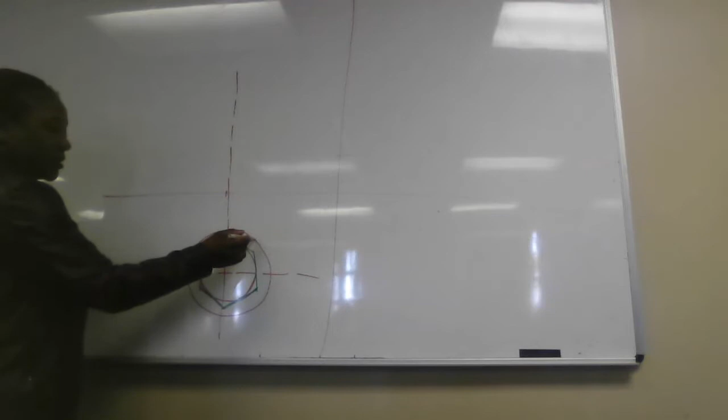45 degrees here, and then 45 degrees that side. Something like that. And then you are going to connect this point to that point.

Once you copy that, you project up. And what are you getting? You are getting your front. This is auxiliary view, and it's also the top view. Why? Because this thing is sitting on the ground.

But there will be questions where they give you when it's sitting like that. You can't say that the auxiliary view is the top view. A top view will be viewed like that, unless when it's sitting like that. Auxiliary view becomes the top view as well.

And that's why I've drawn it here. But when it's slanting like that, you can't use this as your top view. Okay, so this one is very, very, very different. The next thing you're going to do is project up to get your front.

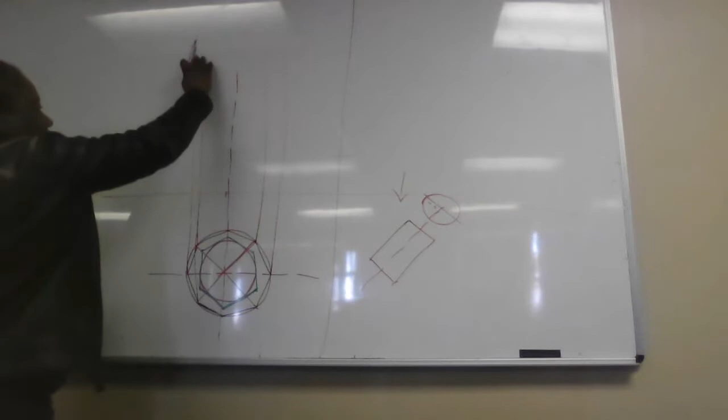This corner is with that corner. And then the center, in this corner you project up. And that one is going that way. Okay. So what I'll do, I'll use this as the base.

And it's got a height. They say that it's cut at 45 degrees. You follow that cut of 45 degrees until it finishes to cut here.

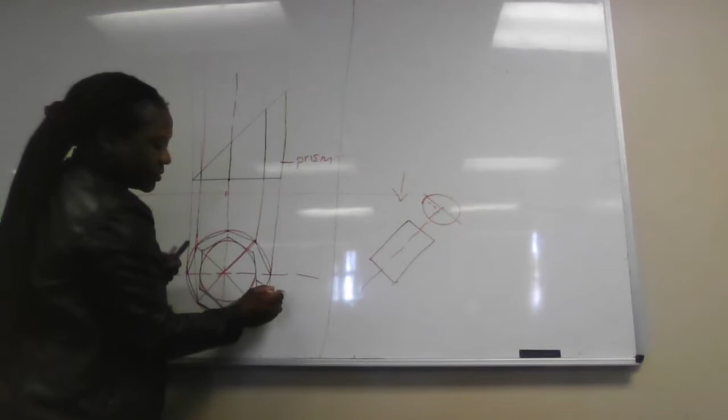Okay. After you cut, you're going to project the inside, which is your, this is a prism, okay? We call this one a prism. And the one that is inside here is pyramid. So you project your pyramid also up, the green one.

So I'll project the pyramid that way, and the midpoint. But the pyramid is going to the apex. If you check nicely there, there's an apex. Yeah, you'll see there's an apex of 90 millimeters from the bottom. Can you see? So you measure 90 going up.

So let's say 90 is up to there. I'm going to use green for the pyramid. The bottom of your pyramid is here. That one, this one, and that one. Can you see my dots?

I'm taking from the green one. You see where they are hitting at the bottom here. Then from there, you take to the apex.

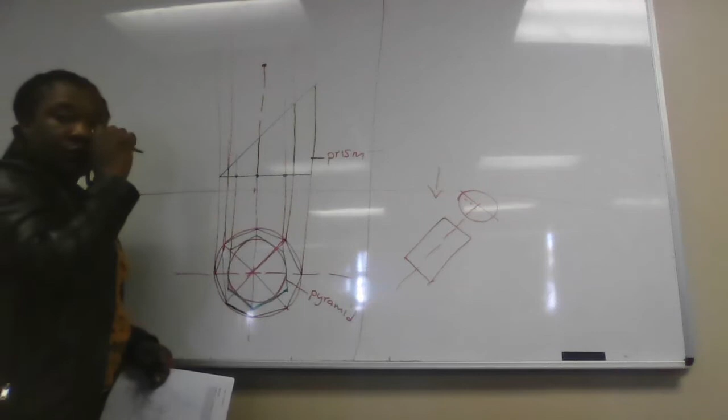So with this one, you can't draw the front before the auxiliary view. You first have to do the auxiliary view. Whether it's sitting like this or sitting like this, the front is always taken from the auxiliary view.

Okay, so this is what I've done. Why the black one is a prism? Because the lines are straight. They are not converging to the apex. But the pyramid must converge to the apex.

So what are we going to do? From there, you join to the apex there. But make sure that you draw with a ruler. This one also. And then this middle one.

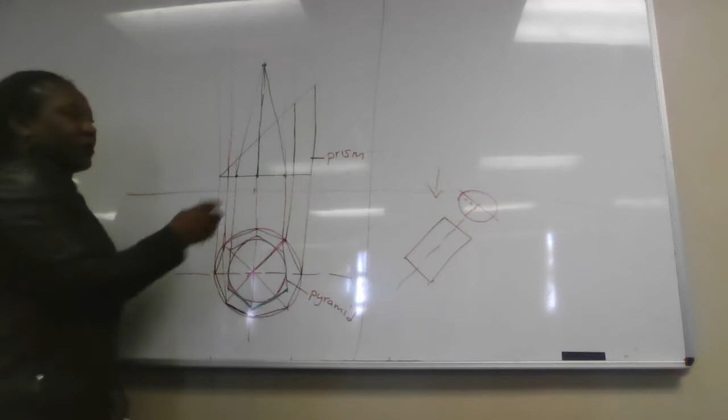But do you know that this is hidden details? Because it's inside. They have even shown you there on the drawing. It's hidden details, this one also. But this one will be solid because of the prism outside. It will be a solid line that way. Then this one will be hidden.

You copy. But before I explain to you this one, I want to briefly just show you the one concept that will help you remember. Let's take, for instance, we have this shape here. And then I tell you that this shape is maybe going that way, straight that way.

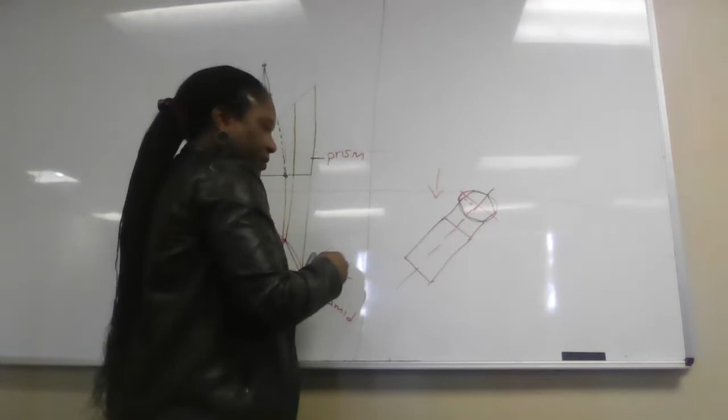Can you see? It's a hexagon, an auxiliary view of this. So you are going to project from there to get the front like that and project like that. Then the midpoint is that. Then you are going to get your, can you see the front?

And this will be solid. Why is this solid? Because it's a corner. You know those corners of the hexagon.

What we do, if we are given this and the examiner wants a right or left, the only secret here is to know, where am I looking from? In first angle projection, the front is a right view. Do you know that? In first angle projection, your front is called a right view.

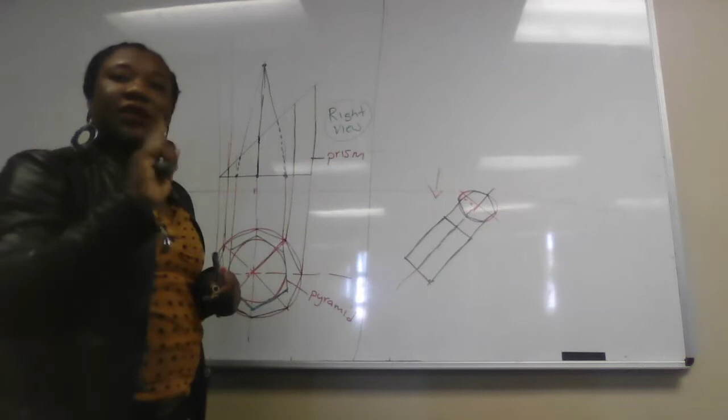So if you read the question, they can't ask for a right view. What are they asking? Left. Because right view is given. As long as it's first angle projection, they will never ever ask for a right view. They will always ask for left. So in first angle, we are going to do the left here.

Then in third angle projection, they will never ask for a left view in third angle because a front view is a left view. That's the difference. So if I give you this one and I want to view from there, it means which angle is this? Third. Because it means the front is a left view.

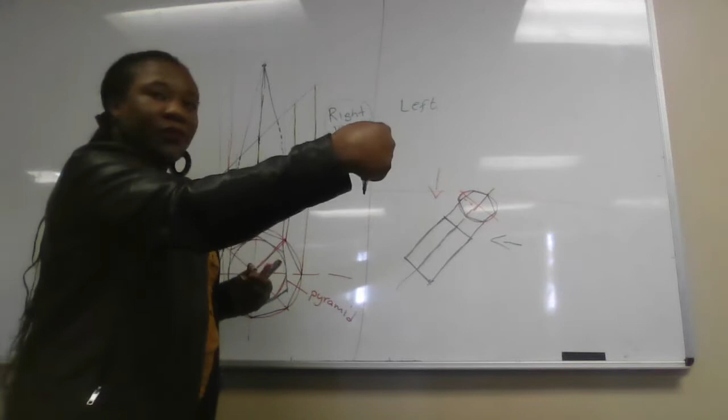So this one, I'll give an example like we are looking from right. And if we are looking from the right, what you are supposed to do is to get a quadrant like that and put the top here. Let's just focus at that. I'm just giving face before we come here. I give you this with its auxiliary view.

So in planning, you will know to say, oh, it's third angle projection. I need to draw the front view down. Then I leave space for top view. The way I did like this quickly here, because I knew it's first angle projection, front sits up on top. I need to leave space for the top view down. And front is a right view in first angle projection. So this is third angle.

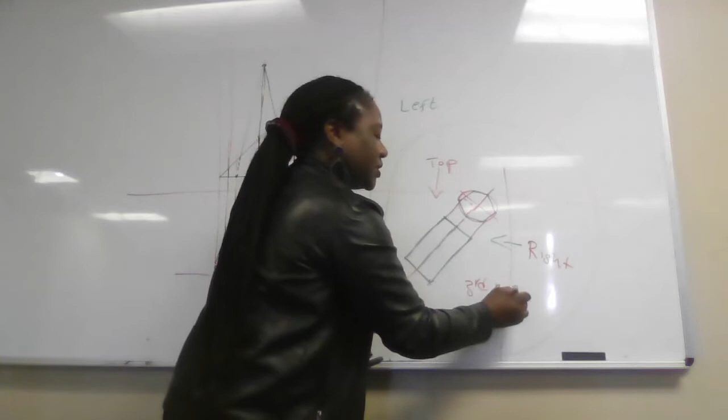And what do we do for us to get the other view here, which is now going to be called right view? You know, I'm now teaching third angle projection. This is your left view, but it's the front. So in third angle, they can't ask for a left unless the question is wrong. They will never ever; always they'll ask for right view, meaning you always look from the right of your front.

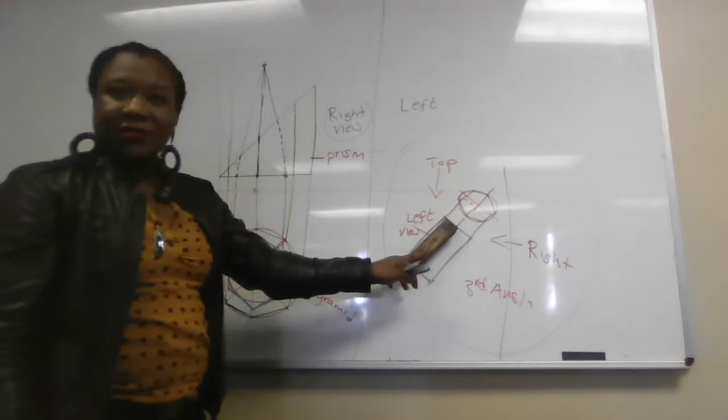So what I tell students is that these things are solids. I think Mr. Rene showed you the prisms. They are not here, they are upstairs. If this is a hexagon prism, assume like the way it is looking, and then I put it like that, and it's sitting on the ground. And then you are looking from there, from the right. Which of the two sides, this side or the bottom side, are you going to see most if you are looking from the right? Which of the sides, this or the bottom? The top, right? Because you are looking from there.

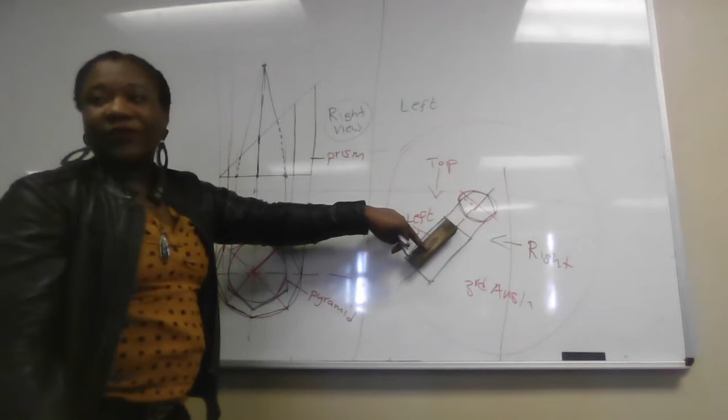And again, if I want it in first angle projection, it's the opposite, because I'll stand this side and I'll see this in full, fully outlined. Okay, so this one, because we are looking from the right view, do you see that you will see most of this than the bottom there? But you need to understand what is the shape here. That is the shape they give you. If it's a square, they will show a square there. But when you start getting your right view, you will get a shape which is here, because that's what you are looking at.

We'll do two shapes. It's like we do a roof and we do the floor. Then what joins the roof to the floor? The wall. Which is the wall? The edges. Those are straight lines when we do the right view. So the first thing I tell the students is that you must always start with the face that you are closer to. So because you are looking from there, project the face here before you do the bottom. After you finish that, already you know this face is fully outlined. No hidden details because I'm looking near there.

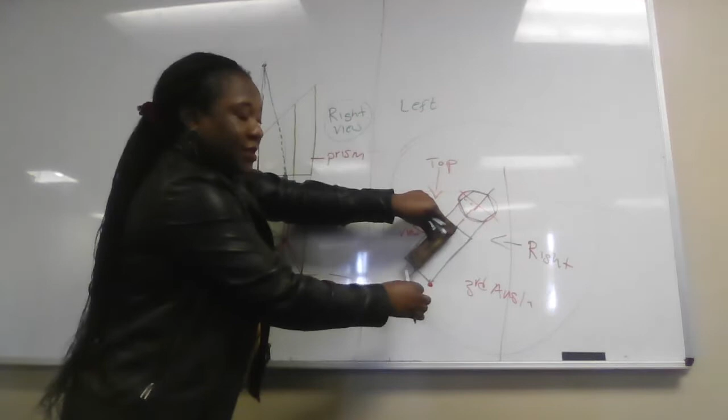And when we come to the bottom here, there's a half which is from that corner to here, which you will see from there, but you can't see this edge when you're looking from that side. So when we come to the bottom side, there's a half which is going to be outlined, and there's a half which is going to be hidden. But this is fully outlined. And again, if I was looking from the left, I was going to outline this bottom fully and leave the top half outlined and the bottom half hidden on the other end. It works like that. So you have to know where you're looking from.

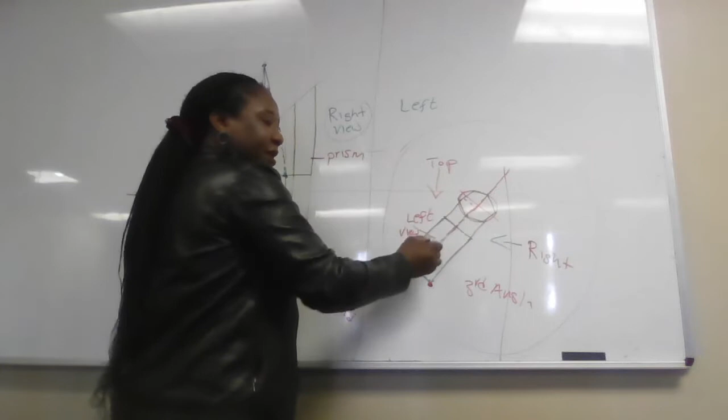Fine. There is our drawing. There is the auxiliary view. When we come to auxiliary view, when I say a right view, it's the right-hand side of this center line. You see this main center line here. Which one is the right of this line? Right, left. Can you see? Look at my arrows. This is left. This is? The way it is slanting, you stand like that. Then you can see right, left.

So when we come to the other half, which is going to be half hidden, half outlined, the one that will be fully outlined is the right half, because that's where you're looking from. The right half is the one that will be outlined. But what we do, we number. You see the corners there. Number 1, number 2, number 3, number 4, 5, and 6. There's an important center line that I want you not to forget. Not this main center line. This main center line is just to demarcate right from left. Where is our main center line here?

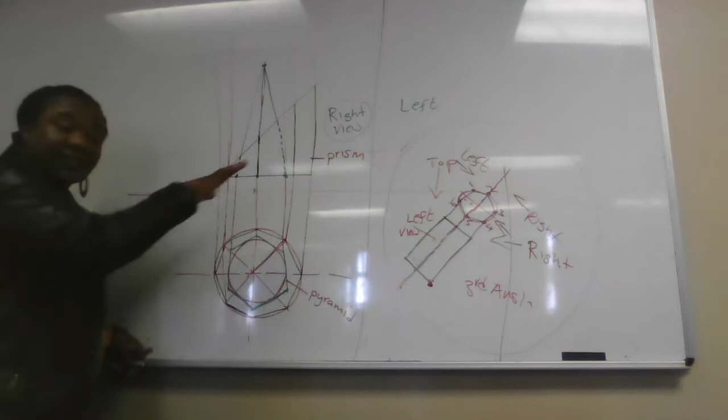Right, left. It's sitting flat, but it's different from that one because this is tilted. So my eyes must be in line with that main line. Then the right-hand side on the auxiliary view will be viewed from 2, 3, 4, 5. Can you see?

When we come to the main object, which is the front view, when we are looking here, we are looking at the faces. It's this face and that face, and this line and that line. If you can see 3, 4, it's this one. I'm going to now number them. Which one is number 1 here? Do you see this is 1 and 6? Can you see? Then also at the bottom is what?

1 and 6. So when I'm creating a roof, I will focus on the points here because that's where I am looking from. Then I've got number 2 and 5. You see this one? We got 2 and 5 and 2, 5. This one is 3 and 4. 3, 4. Now the question is project your right view. To project the right view, you come in that quadrant. You look at the face that is fully visible. We agree it's that one.

So project from each of those corners 1, but make sure you don't draw through your auxiliary view. It must be a bit far because it's untidiness. So we don't project from the auxiliary view. It's very wrong. You can't project from the auxiliary view. The auxiliary view is just to help us get this shape and also to do the marking. I'll show you how we do the marking.

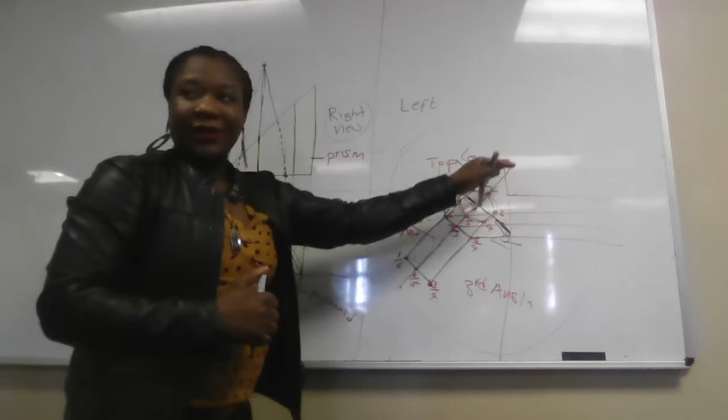And then for you to go and get the marking here, you need to know this center line. I want you to look at this black center line. This black center line is very, very important in drawing. When I'm teaching, I call this one a Y line. It's perpendicular to the main. And the Y line is always a line or center line parallel to the width. Do you know this is the width? When we come to our shape here, is this the width or this is the width? It's this one. So your Y line is this one.

If you know your Y line, this subject will be easy because there will be times they say the shape is facing that side. So your Y line is, that's it. So there we know the Y line. Then when you come to getting the right view, create another line anywhere where it's convenient, maybe like that. This and that, they are one and the same. But here it's looking like from the right view. This is just from the auxiliary view.

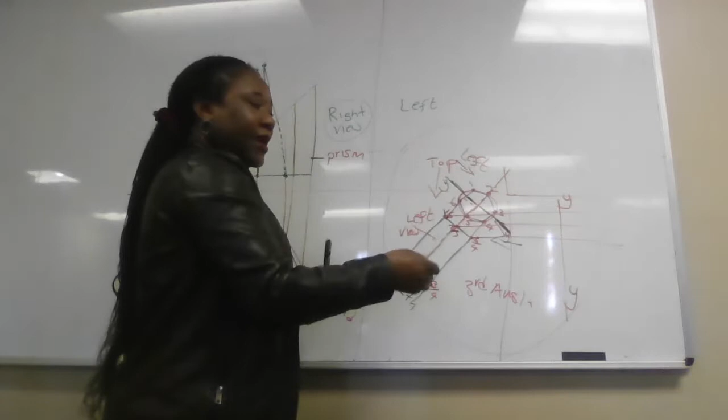Guys, what it means by Y line is that any numbers that are on the Y line, when you are looking from here, you see the way I'm facing like that, the way I did the arrows, I said this is my right view, you remember? So when I'm looking from here, when I put the arrow like that, which numbers are on the right of the Y line? On the right-hand side of the Y line. This is a Y line, you see it? This is your eyes, you're standing like that. Which one is right, which one is left? It's like I'm standing like this. Is this not right, left?

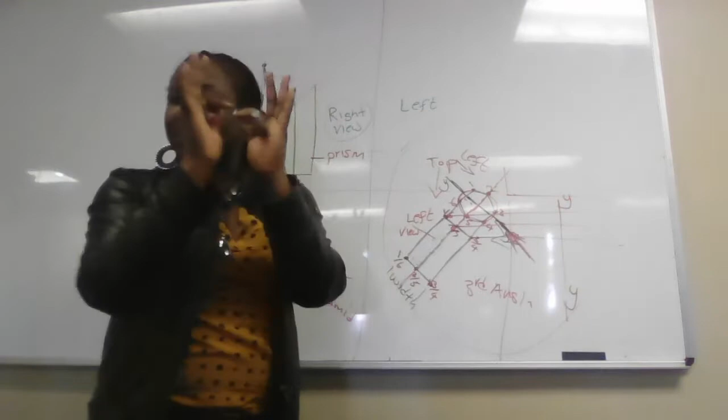When I come to this one, you see the way it's facing. Then if I can put a shape here, let's say it's sitting like that. Then I say 1 here, 2 here. There is our Y line. I must stand the way I'm standing. You see, put the Y line in the middle of my eyes. Then I'll know that 2 is on the right. Maybe there's 3, 1 and 4; 1 and 4 will be on the left of the Y line.

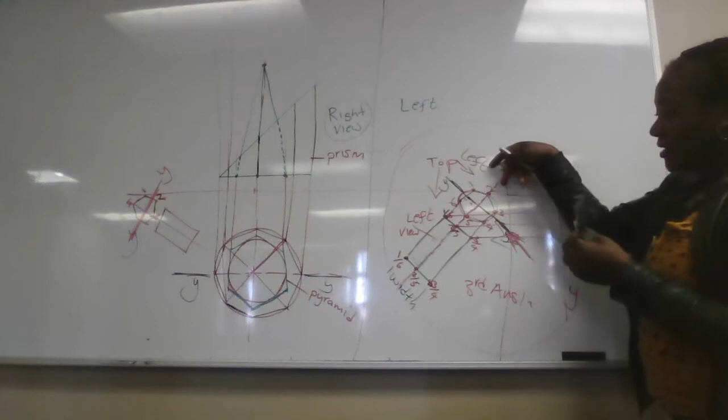You change the orientation, follow the Y line. From the left view, stand on the left like this and look at the Y line. Right of Y, left of Y. Right view, you must be standing like on the right of this. Then you can know right-hand side, left-hand side. Then you'll be marking the same way here, but you'll see how we do the marking. I'll start with 1 and 6.

Is 1 and 6 on the Y line or away from the Y line? This one here and this 6 here. How far from the Y line? You take your compass like that. You see that distance? 1 is on the right, right? And 6 is on the left. So that distance, when you take it, go with this horizontal line, put your compass here, mark what? 1 and mark 6.

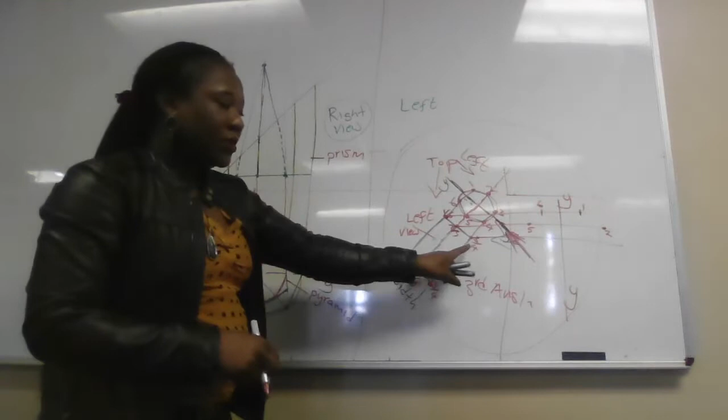We do the same with 2 and 5. We take our compass that way. 2 will be marked on the right, 5 will be marked on the left. That distance you go with your compass, put your compass here, you mark your 2, you mark your 5. And then you go to 3 and 4. Obviously 3 and 4 is the same distance with that, can you see? But 3 on the right, 4 on the left. So I'll just align with 1 and get what? 3. And align there and get what? 4. We have agreed that that is fully visible.

Connect your points. It's 1 to 6, 6 to 5, 5 to 4, 4 to 3, 3 to 2. You see the shape we have created. I'll do the same at the bottom and then later on join them with vertical lines. Then I'm done with that shape.

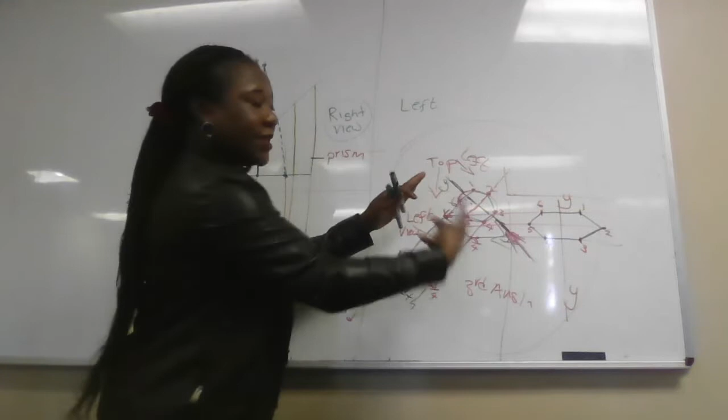When we come to the bottom, one half will be outlined, one half hidden. Which half will be outlined? You come to the main center. It's the right half, not the left half, because we are looking from the right hand side. It will be the right half of your auxiliary view that will be outlined here, which means it's 2, 3, 4 to 5 only. Then 5 to 6 to 1, 1 to 2 will be what? Hidden, because it's on the far left. We are on the near right.

Fine, there is point 3 and what? 4, horizontal line. And then 2 and 5 at the bottom. 1 and 6. For you to mark 1 and 6, you can either align. There is 6, align, and mark 6. Can you see here? 1, I can just align there and mark 1. Or you do the same measurement. Then you go to 2 and 5. Where is 5? There is 5. Align, mark 5. 2, align, mark.

And then we have 3 and 4. The other 4 is here. Align, get your 4. And then go straight there, mark 3. There's your Y line. I said one half is hidden, one half outlined. I've already mentioned which half will be outlined. It's 5 to 4, 4 to 3, 3 to 2. This is this one. Solid. But from here to here, hidden. From here to here, hidden details. From here to here, hidden.

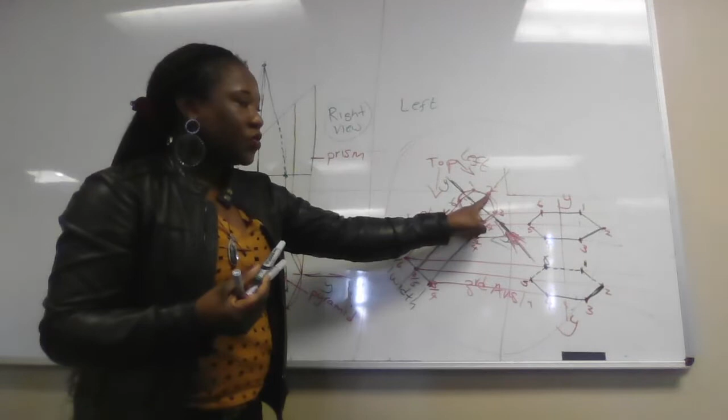We have created the two faces of the solid. Then we need to join them. You can see there on the sketch, they are joined with solid lines. It's 1 on top with 1 at the bottom. 2 on top with 2 at the bottom. 5 on top with 5 at the bottom. 3 with 3. 4 with 4. We have them sitting there. But again, you have to know which ones will be outlined. It's only 2 to 2, 3 to 3, 4 to 4, 5 to 5. Why? On the right half of where you are viewing from.

So I'll start. 5 to 5 is what? Solid. There is 5 to 5 here, solid. 2 to 2, solid. Which other one? 3 and 4, you see? Because it's on the right of the main center. 3 to 3, solid. And 4 to 4, solid.

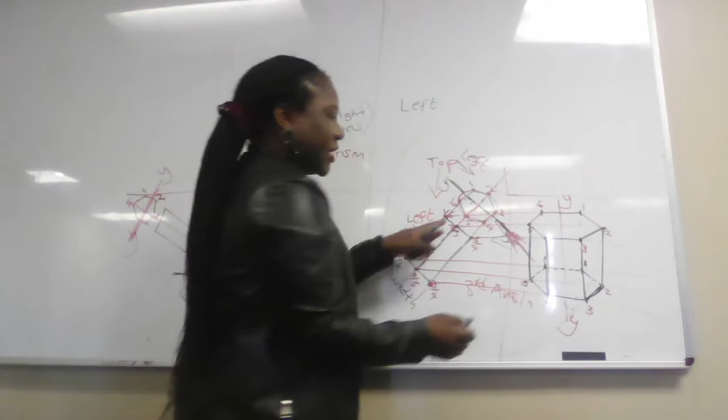Then we can't see how 1 goes to 1. You are not going to see this line here because you are on that side. So how 1 goes to 1 at the bottom is hidden. From this 1 to 1 here, it's supposed to be hidden details. But there's a solid line, so you just indicate hidden here, until that point. 6 also you won't see. You are going to indicate like that. That shape is done.

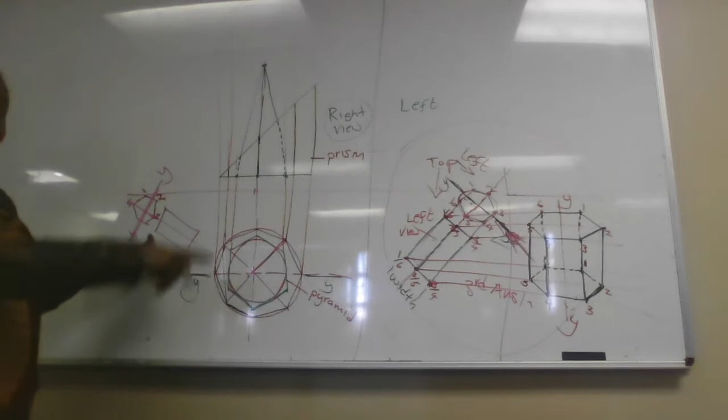It's the basics. It's Y line. It's the main line. Main line is to show right, left. Y line also is right, left, but you follow where the Y line is tilting to. Then you can know which one goes to the right of Y line, which one goes to the left of Y line. It can either be this way, or that way. No other way. It's either sitting flat, tilting to the right, or tilting to the left.

So I'm going to show you only this one, the left view. Because once you get the left view right, it's easy to get the top. How is it easy? You are going to work with projection. You see, there will be a 45 degree line here, right? We want to get the top view in this quadrant here, looking from the top of this one.

Do you know that when you're looking from the top here, you will see the top edge more than the bottom edge? So you project the top points here up: 1 and 6, 2 and 5, 3 and 4. But avoid drawing through that.

It needs to be far. How do I get a Y line here? Go to the Y line here and choose 45 degrees. Take it here. So this will be a Y line on the top view.

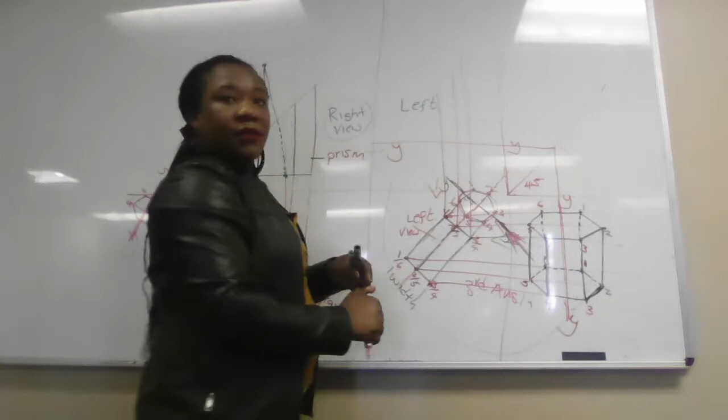Then for me to start getting the top face here, this is 1 and what? 6, right? I need to go there and project 6 to the 45 degrees, point 6 is here, where they meet with the other 6 coming from the front. You go to 1, there is 1 here, up with 1, 45, you get your 1 here.

So let's just make it uniform. The Y line should be in the middle, like this. 6, 1.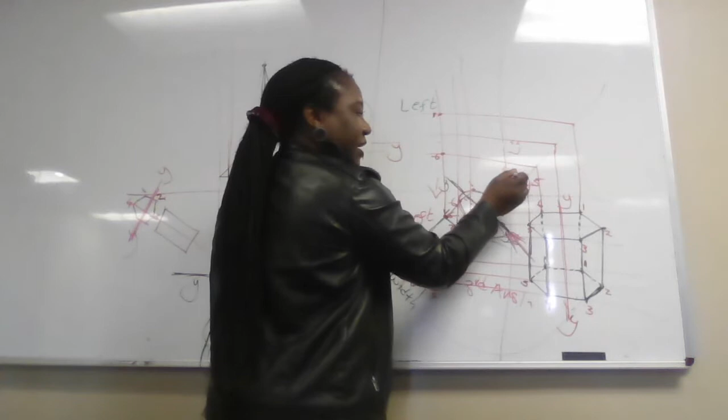Then we go to 2 and 5. There is the line for 2 and 5. Where is 2 and 5 here? You go to 2 and 5. There is 5. Go with 5 until it hits 45. Bring your line here to meet 5 here. There is 5. 2 was on the other end. Go up with your line straight to the 45 degrees line. Take it here and get what? 2, with 2 coming there.

Then the last 2 points is 3 and 4. We already have a line going that side. Where is 3 and 4? It's here, in the same line with the 6. Can you see? Then you come and mark here. Which one is 4? Yes. Then it's 3 here, 3 with 1. Get it here. 3 - you see the shape is formed.

And we know we'll see it fully because that is on the highest point. So you need to outline it. This is the shape you're going to get.

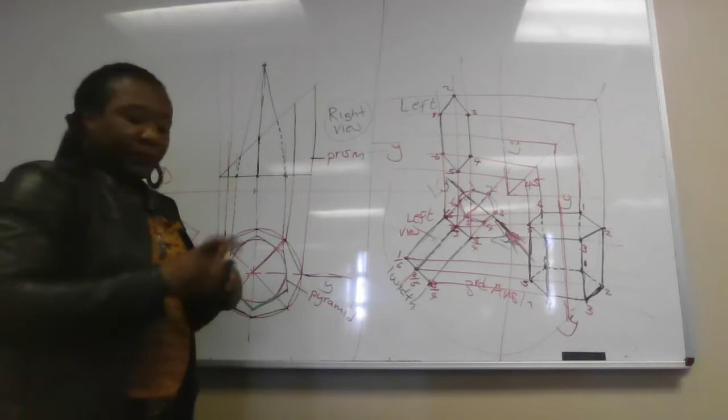Then you do the same at the bottom. At the bottom, we are not going to see both halves. It's one half hidden, one half outlined. Which one is hidden? The bottom piece you can't see. It's opposite now - the one that we'll see is the one that is a bit higher.

Can you see? You will see how 1 goes to 2 and how 6 goes to 5 because it's the one on the highest end. It's like I put it like this. You're on the top view - you will see this edge more than the bottom. Can you see? More than that edge from the top.

Yes, but you project vertical lines. 1 and 6, 2 and 5, then 4 and 3. Again, 1 and 6 - this is 1 and 6. I'll just project this one and get my 6. There is 1. 1 was here. There is my 1 here.

Then 2 and 5, you go up. Where is 5? There is 5. Then another 5 is here. There was 2. Where is 2 here? At the bottom - 2 is there.

Then 3 and 4. Just where 3 was, you come here, you come and mark there. This was 1, then you get your 3 at that point. 4 is going to be here. This was 6, you see?

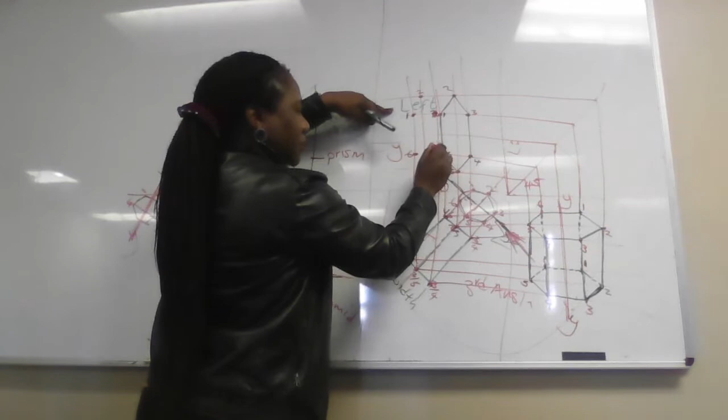Then outline the half that you are going to see. For sure, the outside one must be outlined - you can't have hidden details on the far end. So the outline is 2, 1, 1, 2, 6, 6, 2, 5. But from 5 to 4 here, hidden details. 4 to 3 here, hidden details. 3 to 2, hidden details.

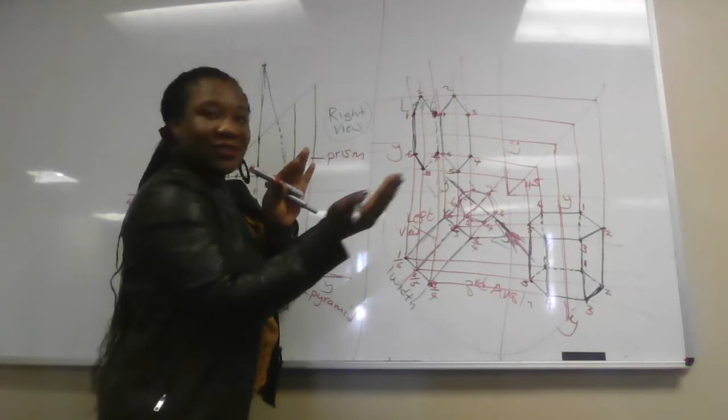There is the other shape. Now we need to join them. Joining them, because you are on the top, you will see 1 to 1, 6 to 6, 2 to 2, 5 to 5. How 3 goes to 3, it's underneath - you won't see it. And how 4 goes to 4 is under - hidden details. It's like this.

And then I'm on top, I can't see the bottom. The 2 edges at the bottom are those 2 - I won't see them. So you are going to join 1 to 1 solid. There is 1 to 1 here. Make it solid. 6 to 6 solid.

Which other one? 2 to 2. Because it's the outside one, solid. 5 to 5, solid. Then now it's 3 to 3, hidden details. There is 3 to 3, you just put hidden details here. Also 4 to 4 here, hidden details.

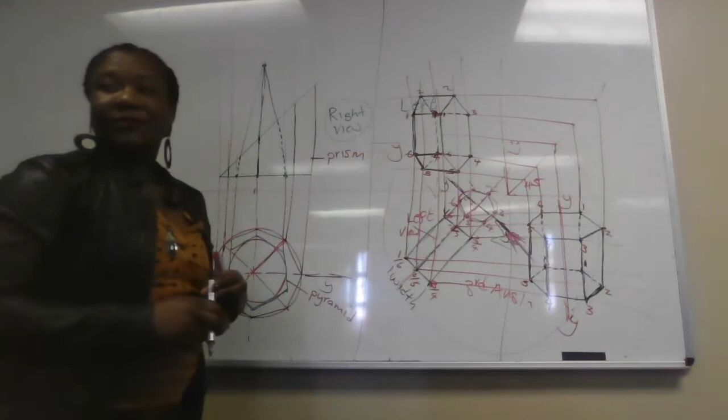Done. It's finished, eh? I don't know if it's making sense. Yeah?

I hope so. So, this one I'll guide you on just how to get the left view. You will get your top view by projecting down.

Immediately, one view, you see the way it is easy here because this is complete. The only way to get this is to mark from the Y line, perpendicular to your Y line. You always have to identify your Y line by looking at the width of the shape.

The main center line is just there to guide us which side we are viewing, for the sake of knowing which half is hidden, which half is outlined. If I was looking from the left, it would be 2, 1, 6, 5 outlined because it's the left view side of the main.

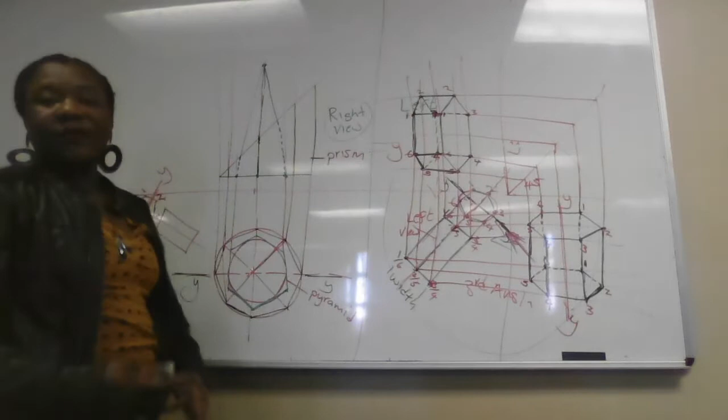Okay, so I'm going to clean this side because I need to project which view here - left view in first angle projection. I was doing third angle here. You see the setup of third angle: the front is down, the top is here, right view - this is a left view.

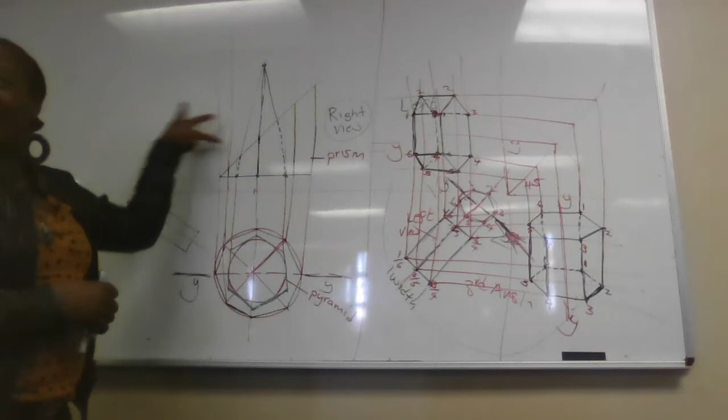When we come to first angle projection: top view, front, which is your right view, and then the left view must be here. Now here we'll be looking from - can you see? We'll be looking from the left side of the front, and now from the left side of the auxiliary view, because it's sitting flat.

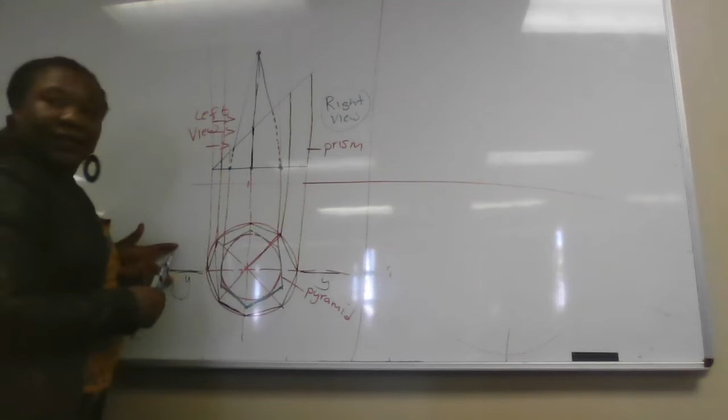Then when we come to the auxiliary view, which is the left side - I said that to identify the left side, you use the left side of the main line. You see the main center, this is the main center. So our left is this side. On the auxiliary view and on the front, they are the same. It's different from that one because it was tilting like that.

Let's number them. How do you number? You start with the bigger part. Here we have two pieces - there's the prism, it's a hollow prism, hollow inside, and there's a pyramid sitting inside the prism. That's why you see hidden details like that - it's this pyramid that is sitting inside.

But we didn't even finish - it was cut, right? It was cut at 60 degrees, coming like that and like this, then this whole piece is gone. And then there was a circle or cylinder sitting like something like that. It's cut.

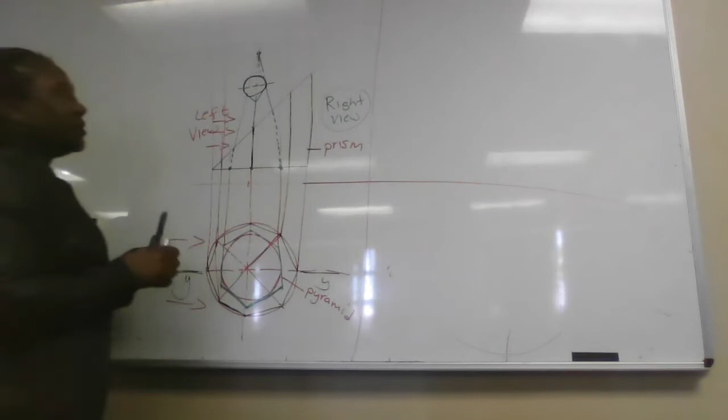Now we are going to mark from the auxiliary view. Let's start here - I'll call this one number 1. Then this corner here, number 2. This other corner, number 3. This number 4. This other corner, number 5. This number 6, 7, 8.

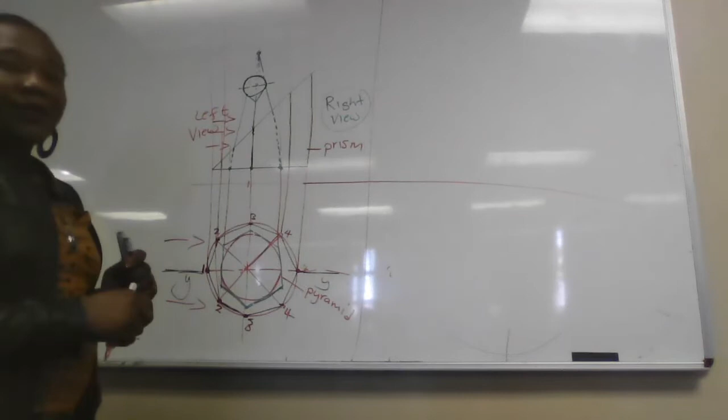But I usually number them this way: 1, 2, 3, 4, 5. It's much easier, can you see? It's 2 and 2, 3 and 3, 4 and 4 - why? Because it's symmetrical. You can number like that - I mark 2 here, 2 there, 3 here, 3 here, instead of numbering until 8.

We start going up here. Which one is number 1? Can you see number 1 here? 1 point for number 1. Number 2, when you go up, there's 2 at the bottom - can you see here? And 2 where? Yes. Then you go to number 3 - it's 3 at the bottom and 3 at the top, only up until where it was cut.

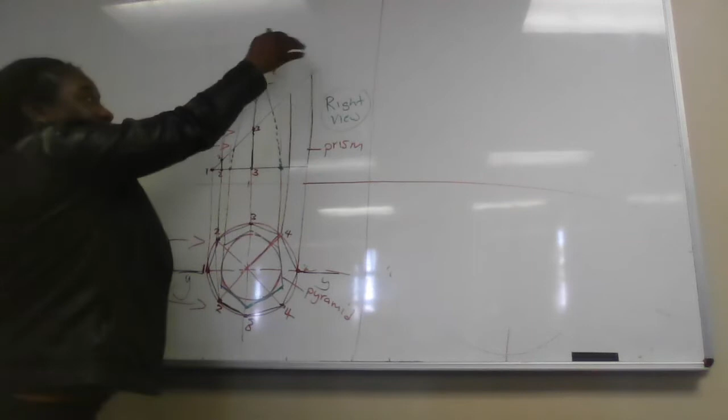Ignore the rest - it was like that, but it's been cut off, so just work until the cut. Then it's number 4 - when you go with 4, there's 4 at the bottom here, and 4 at the top. Number 5, this is our 5 - it's 5 at the bottom, and 5, done.

So when we are looking from the left view, you must tell me yourself, looking from the left side there, what do you see most? Obviously it's that face, can you see? All of the points there you will see. You will not see the shape of the octagon because that is just a line, but in the front you see the octagon.

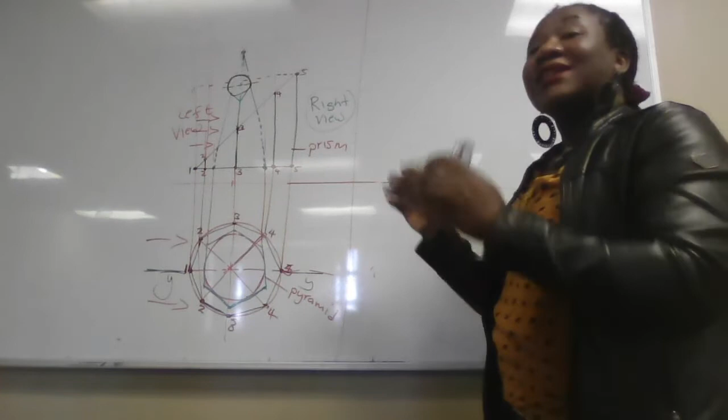Coming to the bottom of the octagon, do you know that 1, 2, 3, 4, 5 - they are all at the same plane, in the same line, but at different points. Why at different points? Because they will be lying at different positions. You see number 1 is on the Y line - this is the Y line, it's that Y line I put here that we need to introduce. So this Y line is the same as that Y line - so any number that falls on the Y line must be on the Y line here.

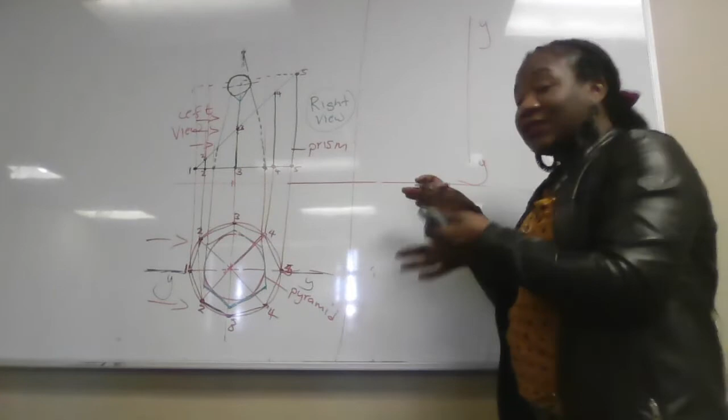Any number on the right of the y line must be on the right of the y line. But how do I look at the y line? Not the way I'm standing here. It's on the left side, because we are viewing from the left, so I must stand here. The numbers on the right of the y line are 2, 3, 4. We have the same numbers either way, it's much easier either way. But if I numbered 1 through 8, then 6, 7, 8 would be on the right.

So you are going to project, starting with the bottom, a straight horizontal line. Start marking with number 1. We haven't gone to the cut yet, I'm at the bottom first, where the bottom is the same solid line. Where is number 1 in relation to the y line? It's on the y line. When you come here, you just mark 1 here, you see, there is 1 on the y line.

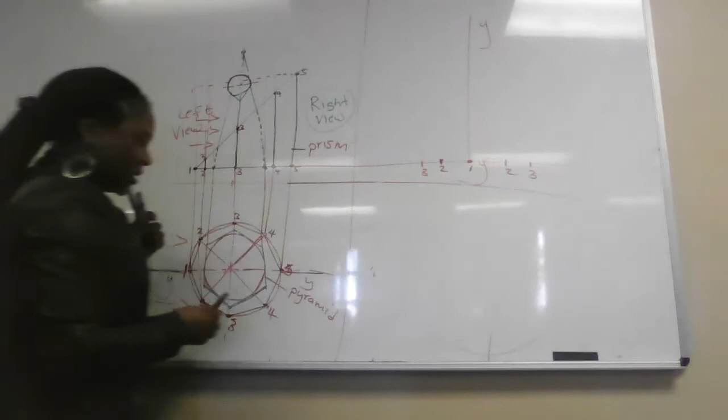Where is number 2? You see that distance, which is the same, so there's 2 here and 2 there. Once you take that distance for number 2, put your compass on the y line and mark 2 and 2, on the same plane, because all these numbers are at the same position. For 3, take your compass and get 3 like that, then put your compass here and mark 3 and 3. Which one is left? 4 and 4 - 4 is here, but when we come here, how far? Take that distance, it's the same height as 2, so 4 over 2, over 4, same distance.

Then it's number 5. Is 5 away from the y line or on the y line? On the y line, so it's 1 and what? 5, because this is our y line, so it's 1 with 5, 1/5.

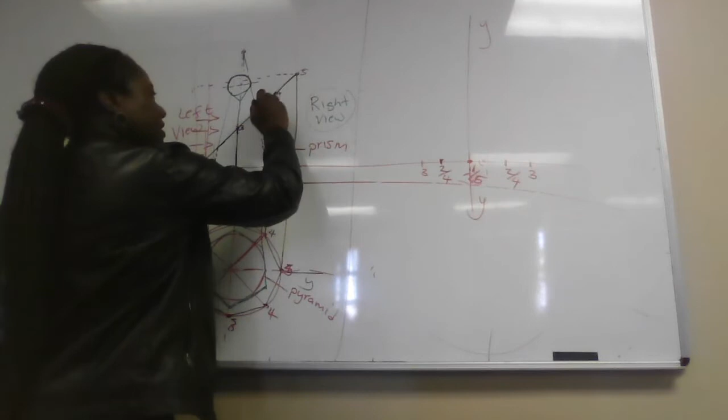Once you do that, now you go to the cut, because the bottom is dealt with. When we go to this cut here, they are at different heights, can you see? So start with 1, 1 is the same, there's no 1 up, can you see, it's fine. The only one that is higher is 2, so we start at 2. You are going to project this horizontal line, then 3.

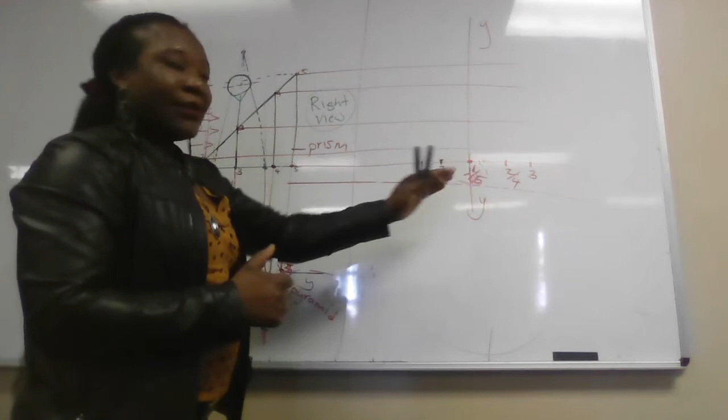4, and then you project your 5. Now it's marking, you don't need to stress, you already know the position, you can just align. So if I want 2, you see this line of 2, I'll just go and align with the 2 here. Can you see, already 2 is here on top, that's 2, and on the right there will be 2 here. Just align, that distance is the same distance we took here.

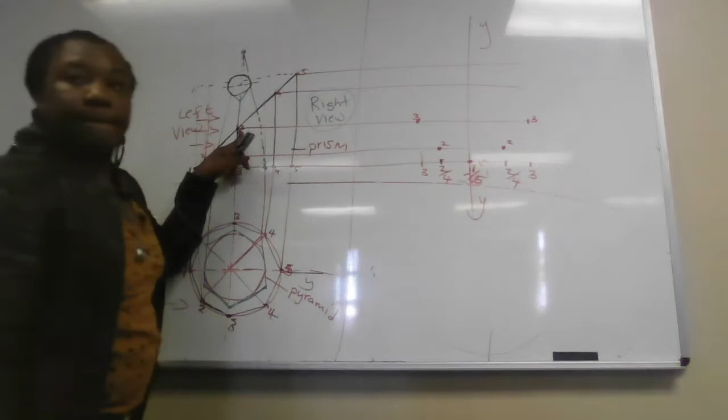We are done with 2 on top, on the cut. Go to point 3. That line for 3, where was 3 at the bottom? Here - you align, mark 3, and you go up and mark 3. Then you go to point 4. Point 4 is together with 2, but in this line, so you go straight there and mark your 4, and on this side there will be 4 - that is this 4 and that 4.

And the last one is number 5, which is on the y line, you agree? There is 5, here it will be there, number 5. Being that we are looking from the left, we will see the cut, how it's chopped. So all the points will be connected solid.

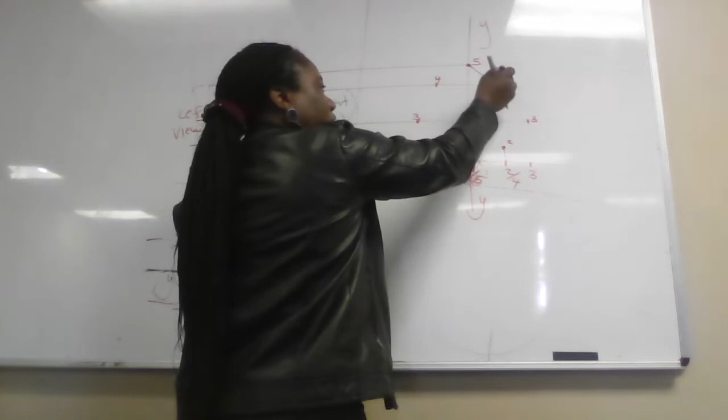You are going to join 5 to 4 with your straight line, then 4 to 3, 3 to 2, 2 to 2. Then 2 goes to 1 - sorry, this is wrong, can you see there, 2 goes to 1. So from that 2 you come to 1 here. It will come out like that because 1 hasn't got a height on top. Then from 2 to 3 again, and then to 4, and you can see the shape on the surface.

Then you start joining them. When we start to join 1 to 1, 2 to 2, we have to come back now and see which one is solid, because it's not everything that will be solid.

Which one will be solid? We come to the left side, you see, the left side of the main center line. Those are the numbers to outline here. You will see how 2 goes to 2, and 3 to 3. But 4 to 4 and 5 to 5, no, because it's on the right. We are looking from the left.

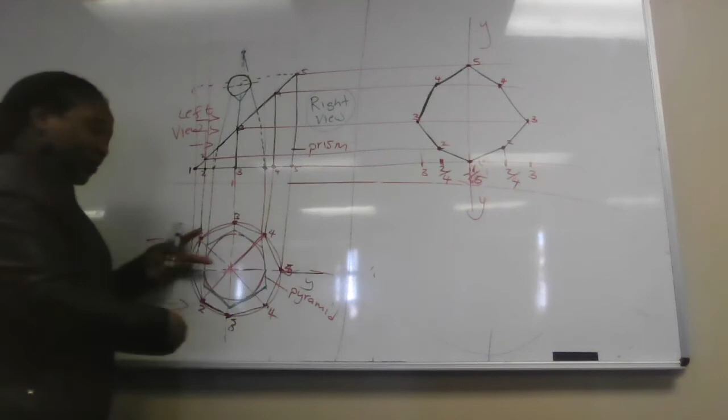So I'll start 1 to 1. 1 is a dot, you see. 1 is 1, and 1 is there. So it's 2 to 2. You see this vertical line here? I need to see it there. It's on the left half. Where is 2? The 2 was here with 2 here, solid. Can you see? Also 2 with 2. 3 with 3, solid.

And the bottom should be solid because it's sitting on there. This is the solid line, it's the outer edge. You can't have the outer edge in hidden details. It's wrong.

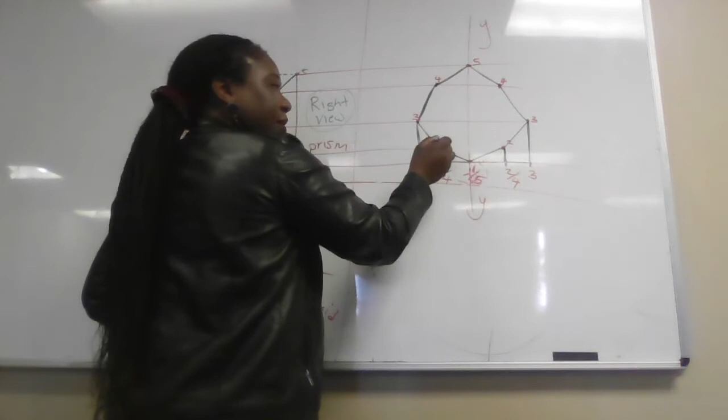Then how does 4 go to 4? Hidden details, because it's on the right-hand side as we are on the left. So 4 to 4 here. You know there is the 4 here, it's going to be hidden details. But here it's 2 and 4, right? You know that, it's 2 and 4. So it's going to be hidden details.

And 2 there. Also 5 to 5, hidden details. Where is 5 on top? Here. Where is 5 at the bottom? There. This line will be hidden details.

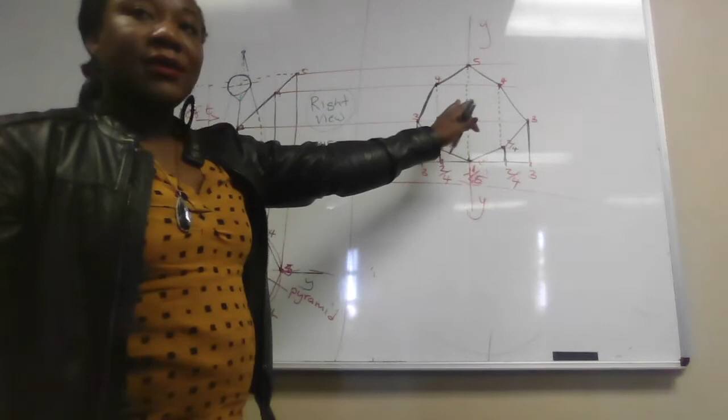The red lines must be very faint on your page, it's construction lines. What I use, blue, green, black is for the outline when you finish. So that shape, we are done.

We need now to get the pyramid. How do we see the pyramid from the right? With the pyramid, you need to come back and also number it. How are you going to number? You can number A, B, C, D to avoid confusion. So I will number point A at that corner, B here, point C here, and C here. I'll have C and C, B and B, because it's symmetrical, and A and A. So we number like that.

And then you start to project. But where do you project? At the bottom. Let's start. Do you see that this is A? Check how I got that. There is A here, then I started taking that line to the apex. There is A here, following the same line, going to the apex, and there will be A here. You see the 2 points I've got for A.

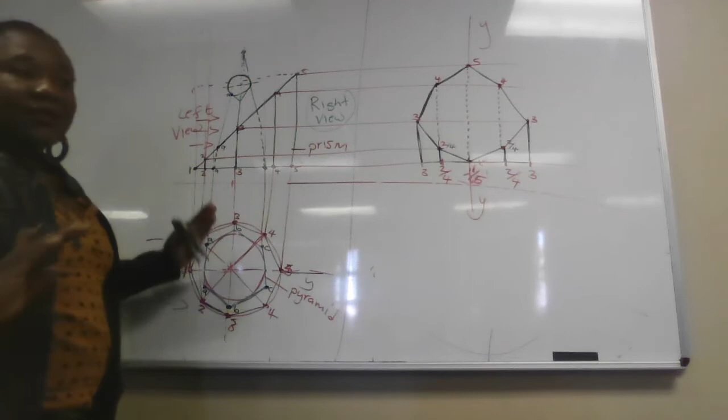You do that whenever you're dealing with pyramids. Follow, even if the apex is cut away, you must always take your base to the apex. That's how you win, because I can't get to this B before I get B at the bottom. Remember, we get the bottom first, then take them to the apex, then we can see where they will be cut.

So the next one is C. This one here, point C. There's point C, and there is point C there, cut there. Can you see? Yeah, so let's mark the bottom points the way we marked the bottom numbers with the prism.

In relation to the Y line, let's start with A. You see A is still sitting on this line. Where is A here, on the Y line or away from the Y line? If it's away, how far? You do this.

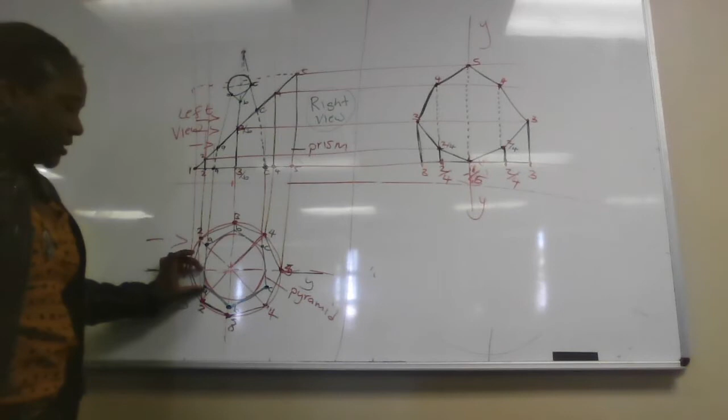That's the distance, eh? A to A, A to A. Take that distance, go put your compass there. You are going to mark your point. Let's say A is here, and another A here. You mark.

Then B. There's B. You take your distance from the Y line to B, like that, which is the same distance to B here. You go, you put your compass there, you mark B, and on the other side you mark B from the Y line.

And then it's D, D or C. C and C is the same distance with A. So it's A and C together. You are going to say A over C and A over C.

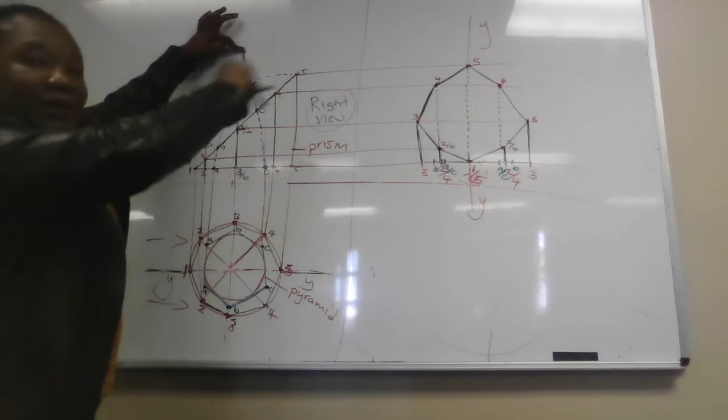Once you create your base, project the apex as well. Even if it's chopped off, we need it to guide us to get the triangle shape. So this apex here, you are going to go with this, and this is the point here.

So from A, I'll go to the apex, from B to the apex, just like that. Then to start getting the shape of the cut, I'll come here and see C with C, B meeting B, going to the apex, then we get that cut. It will be formed itself.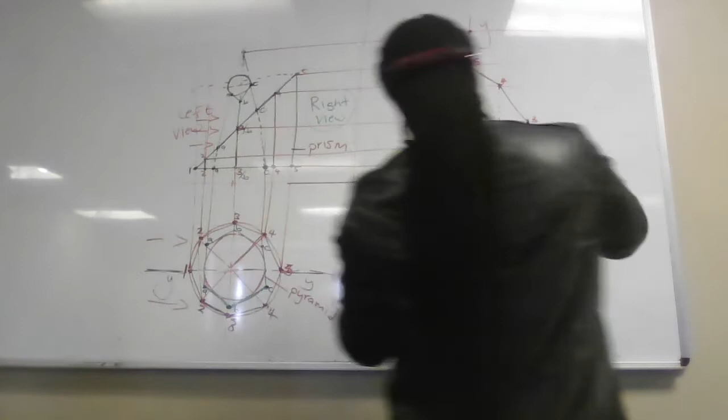Okay, so what I'll do, I'll use red first for now as construction line. So I said A to apex, there, A and C. This is A and C. Then it's B. Then you come to A and C here. We start there. And then B.

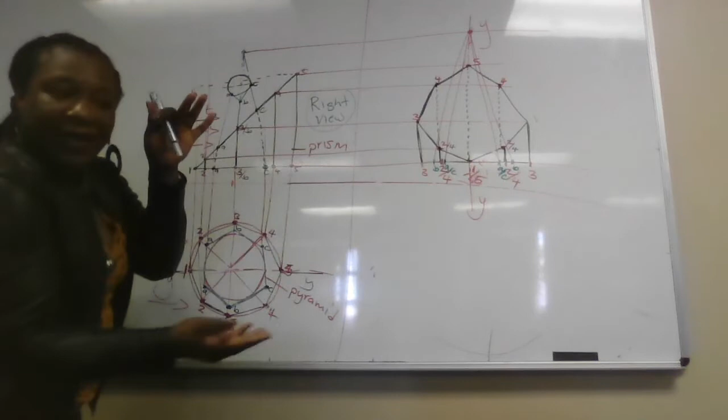So let's now go to the next level. We are done with this and that, but we need A, B, C, A, B, C to produce them here. If I come to this A here, how will I get it there? I need to go with a line from A, and it must meet with the line going to the apex, the line from A at the bottom. So there's A. You take your line like that.

Where was A? Here. Where are they meeting? Here. This is A at that surface. We do the same with what? C. But remember there's A there on the right also. So it's A and A. You see the 2 points for A, which is C as well. It's AC and AC, 2 points.

Then we go to B. B was starting here going to the apex. Where does it meet with this B? Here. You get your B and you get your B here.

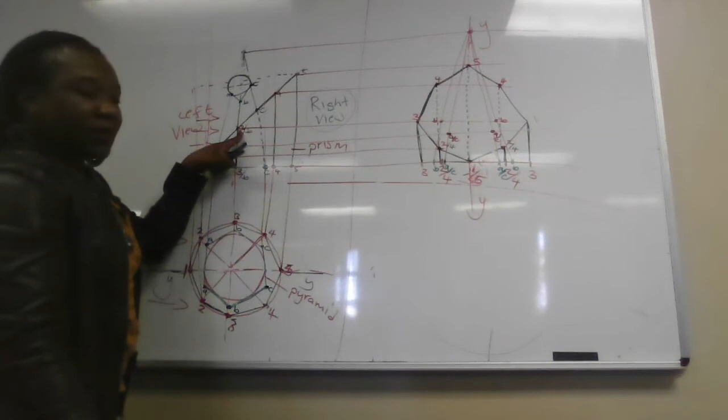Okay? Then it's point C. You take it to the right. And C is with A. Can you see? C is with A. So what you are going to do, this is not even C here. You are going to mark C at that level because that's C here. It's only for A. So you can't say A and C here. There's no C here, it's A. The C belongs up here, but on the same line for A. So there is going to be our C. And there is going to be C.

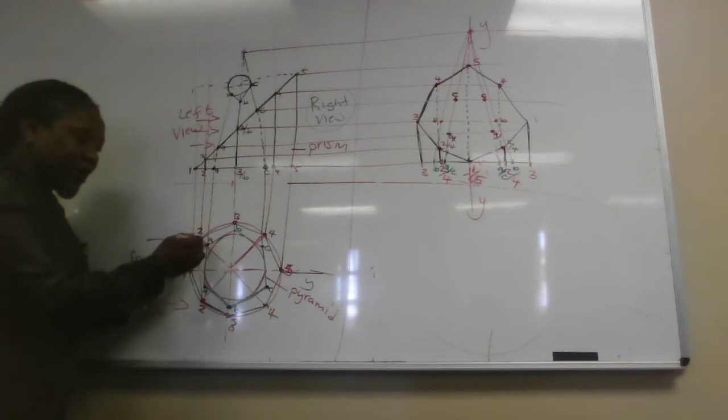And I can tell you that when you're looking at that surface, you will see the left half of the hexagon, left half in relation to the center line. Which are those letters? It's B to A, A to A, A to B. Solid. The back portion you won't see. You will not see how B goes to C, and how C goes to C, and how C goes to B. Those will be in hidden details because they are on the right half.

So I'm going to outline A to A. Where is A to A? There is A to A, solid. And then A to B. Then it's A to B, solid. But how B goes to C, hidden, and how C goes to C here, hidden, B to C, hidden. You see the shape? Yeah, it's a straight line.

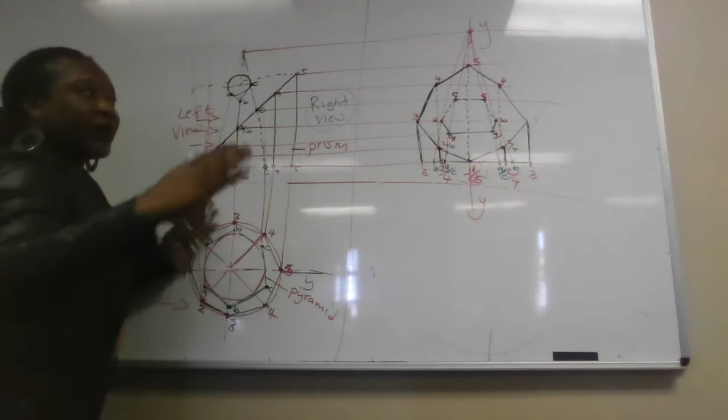What is next? Next is that from A to A, it's a solid line, but you need to locate this A. How do we locate this A? Take the line there, where it meets with the A going to the apex. That's the point. So there is point A on top here. You do construction line. Where does it meet with the A? This was the A going here. Can you see that point? Point A from there. And on the right as well. There is the other A. Here.

Then we go to B. B also you project. And B, you make sure that you follow the B. Where is that point? This one, eh? Yeah, this B. And there is another B there.

Then it's what? C, the cutting C. C is going to be cut also at a higher level. This is the maximum of all of the 3 points. How do I get C? Can you see it's C and A? So C is here. And then C there.

Now, how am I going to see that this is visible? I come back again, left-hand side. So I'll see A goes to A and B to B, A to A, B to B, solid. But I won't see how C goes to C and how this C goes to C because it's on the right. So we have to outline A going to A, solid.

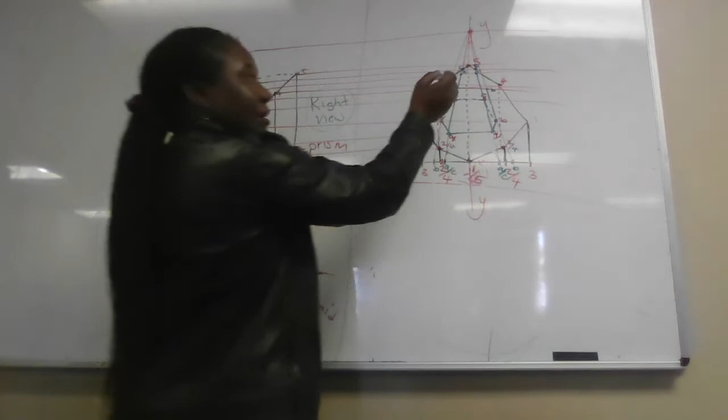Even on top. Where is A? You see the A here. A coming to B, solid. It's the left half. A to B, solid. A to A, I'll see. You see the one I'm outlining. It's this. You are looking from there.

But how C goes to C and C to B, you won't see. Where is C? Up here. There is C here. So C coming to B will be what? Hidden details. You need to put hidden details there. And C to B there will be another hidden detail. And C to C, hidden

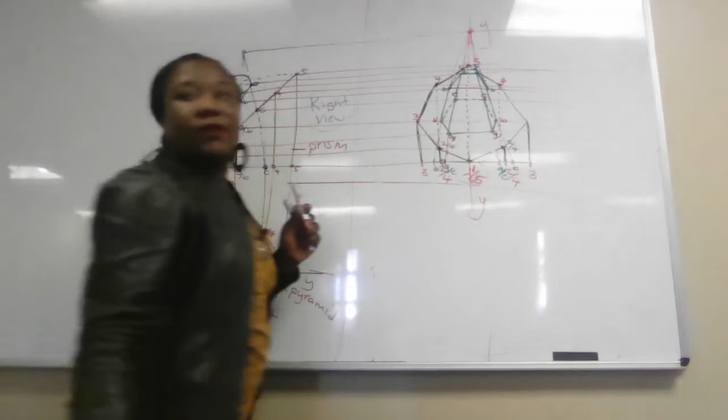details. You won't see how this C joins with C unless we are looking from the right. You won't see how C goes to B because you are here. You only see the left half of the auxiliary view. So once you make that shape, the only thing left here is to do it.

Obviously, how C goes down to C we didn't show. Where is C? There is C coming to C here. You are going to show hidden details. A small piece only there on the top. And stop there because there is already a solid line. That shape is done. And then the only thing that you are going to do is to get a circle.

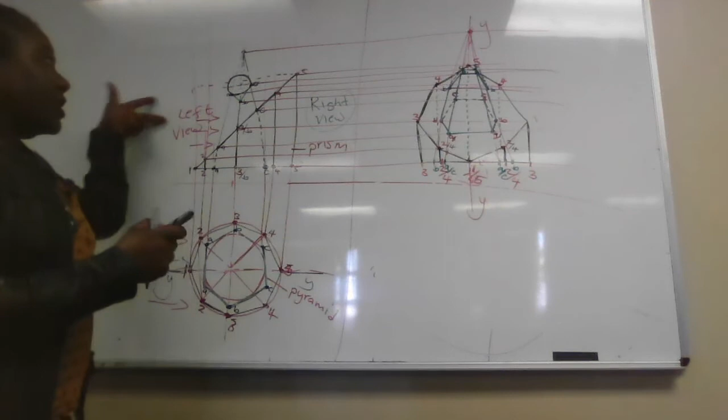This is a cylinder. It's a round pipe, not a pipe, a shaft. It is a shaft. And when you go to the right, you will see how long it is. If you read the question, it's saying 80 millimeters, diameter 20 shaft. Can you see that? It's 80 millimeters long if you read. So if it's 80 millimeters long, you are going to say half of 80 and half of 80. It's 40-40. But again, we project this cylinder.

And also from the bottom there. Then you mark half of 80, which is 40. Maybe it's ending here. Until there. And there. And then you make it solid. It's a cylinder. So you see the length. And when we come here, you see the pieces here. Which of the two is in the cylinder is more visible than any other.

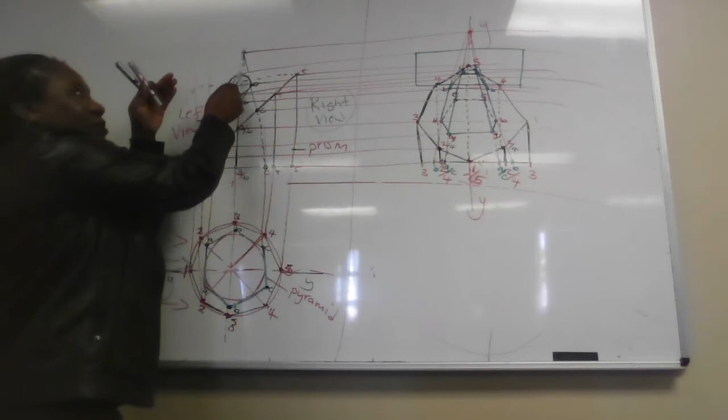So you're going to make this C hidden details, and this piece will be hidden, you understand? That piece here will be hidden details because the cylinder is closer to you. You are on the left. So this is more visible than that piece. We change this to be hidden details. And all those things that are behind the cylinder will be hidden details also. We are going to change.

But this one is closer to the cylinder. So this one is the only piece of the cylinder, hidden details. Here. And use green. Yeah, that piece of the cylinder will be hidden details. Up until there, then it becomes what? Solid. You even put a center line because the cylinder needs to have a center line. You put the center line.

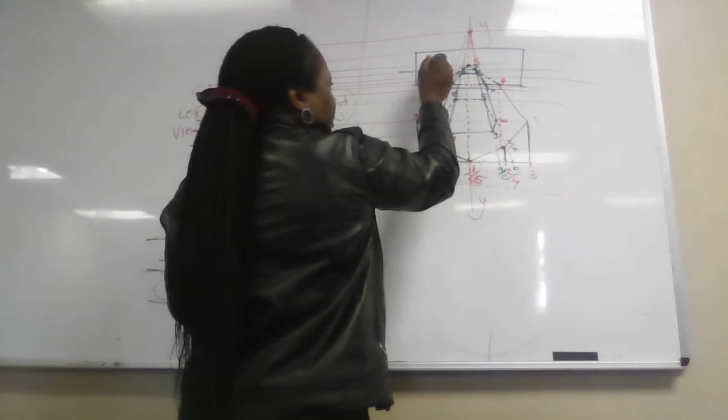80 millimeters long. That is drawing. You visualize in 3 dimensions. And there's nothing that we have left there. This question was saying that you must show all the hidden details. We have put all the hidden details. We have projected. We have shown construction lines. You will get this is 25. And remember that when you copy and it's wrong, everything is wrong.

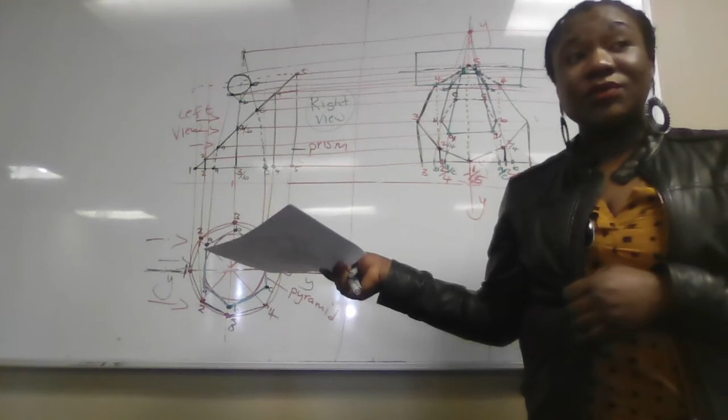Then you go to the concept of polygons. Module 1 or Module 2 taught you how to do hexagon, across the corners, across the flats. That is that concept. The good thing with this octagon here, they gave you the diameter of a circle. It was easier for me to do it. Just draw a circle and do 45 degrees. And then join the corners. And then how do you know it's across corners? When the center line is passing on the corners, you know that is the polygon inside the circle.

But when you see the center line is passing on the flats, then you know that it's across what? The flats. Especially the main center line. You see this main center line. Then you know. I'm saying if you see the center line passing on the corners, you see those corners, then you know that this polygon will be drawn inside the circle.

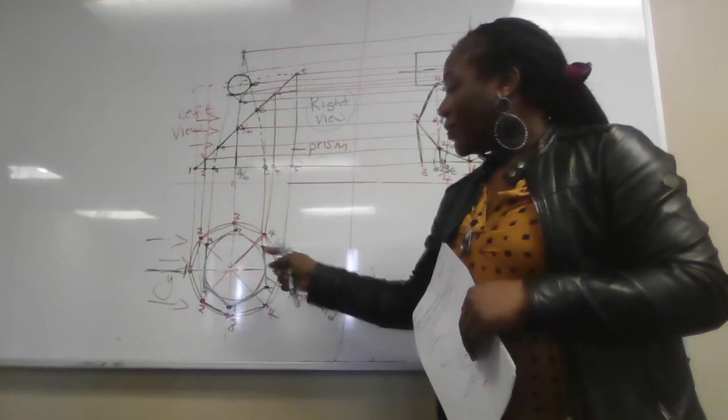And again, when we come to this hexagon, I'm not sure the method I used for the hexagon is the right one. It can be the one for inside or for outside, you know that. So once you try both, check the size. If the size is still 25, then one of the two is correct, because the other one is smaller. Yeah, the one that's inside the circle will be smaller. Just make sure you counter check for the hexagon.

Okay. That's how you do the solids. Unless there are questions, I think I'm done. Easy. Yeah.